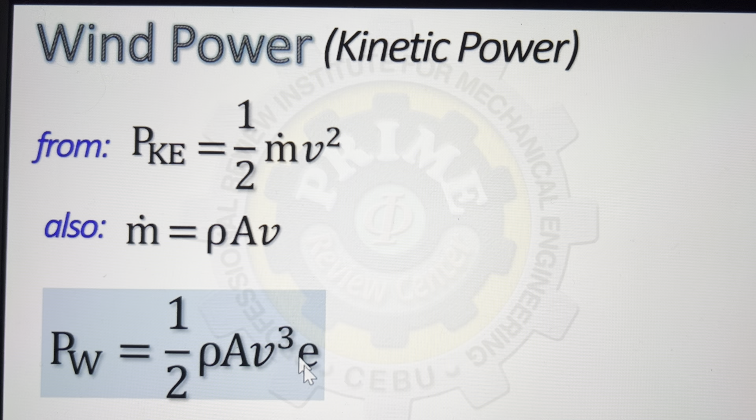Sabi natin sa thermodynamics, mass flow rate is density times the cross-sectional area or the normal area times the velocity. So pag i-combine ko yung dalawa, your kinetic power or wind power kung tawagin is 1/2 density area velocity cube. Ita-times mo ng efficiency kasi tayo ay work producer. Okay? Paliit ng paliit kumbaga ang ating output power.

Okay? So tatandaan natin at STP or standard temperature pressure of air, that is 1 atmosphere 21 degrees Celsius, ang ating density is 1.2 pag SI, pag English naman ay 0.075. But if not STP, since air is an ideal gas, assumed to be ideal, gagamit tayo ng PV equals MRT, density is P over RT. Yan yung gagamitin natin. Okay?

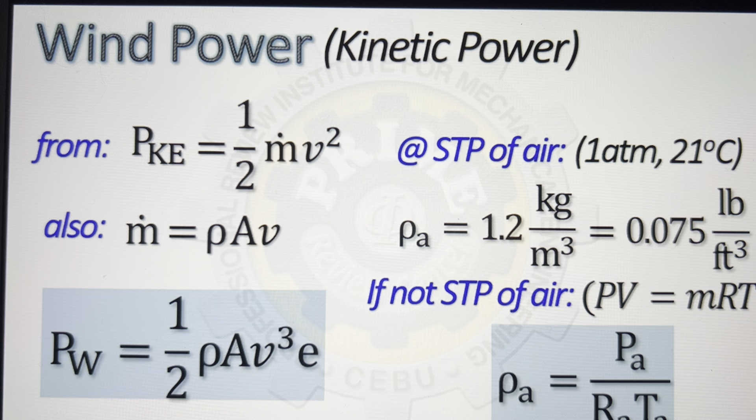So magaan-gaan lang to. So let's try this example. Our country is embarking into use a renewable energy source like wind power to save energy. Determine the maximum power in kilowatts delivered from 55 kph wind. So meron tayong given na 55 kph para sa velocity. The rotor blade diameter is 32 meters. The overall conversion efficiency is 35%. The air pressure is 100 and the temperature is 32.

Again, kukunin natin ang power to be delivered. Okay, power to be delivered. So, again, tandaan natin, this is the formula. So, kung papansinin natin, sir, direct sub na ba? Hindi pa, kasi hindi tayo naka-STP. So, again, pag hindi STP, ito yung formula natin.

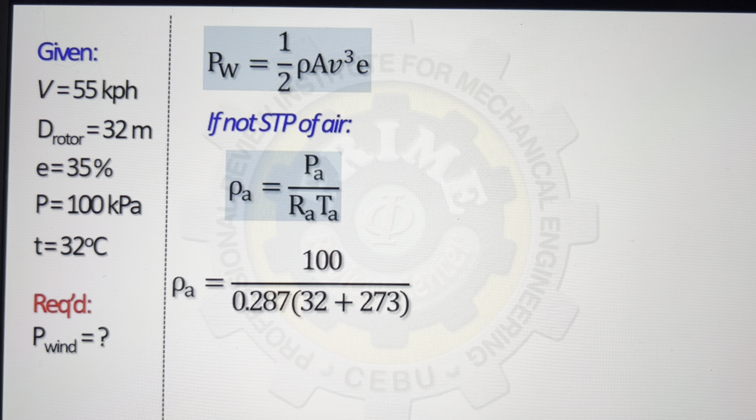So, kunin lang natin muna ang ating density. So, this is your density. SI units tayo. Direct sub naman yan. So, ilalagay ko na lang. Okay, so this is our calculator.

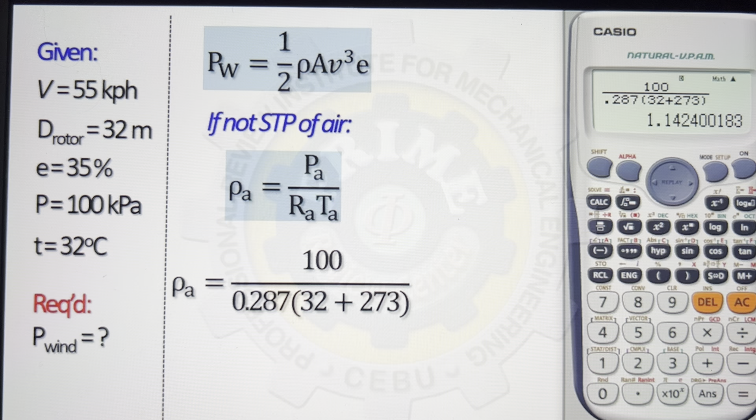Lagay natin. Your density is pressure 100 kilopascal. Of course, R ng air at SI is 0.287 kilojoules per kilogram Kelvin. And then your absolute temperature is 32 plus 273. So, makukuha natin na 1.142 ang ating density. Then, after that, pwede na natin kunin ang ating kinetic power.

That is 1/2, density as solved, 1.142. Of course, the cross-sectional area, since bilog yan, may diameter, is pi over 4 d squared. Then, the velocity is 55 over 3.6. Sa mathematics, tinuro na yan. Conversion factor, kph divided by 3.6 magiging meters per second, cube natin. And lastly, the efficiency. So, input na lang natin yan sa calcu.

Lipat lang natin to. Okay, so dito na lang. So, ilipat natin. So, ngayon, that is 1/2 or 0.5 para mas mabilis pindutin, times 1.142, times area is pi over 4 diameter squared, that is 32 squared. Then, you have your velocity. It should be in meters per second, kaya meron tayo sa denominator na 3.6.

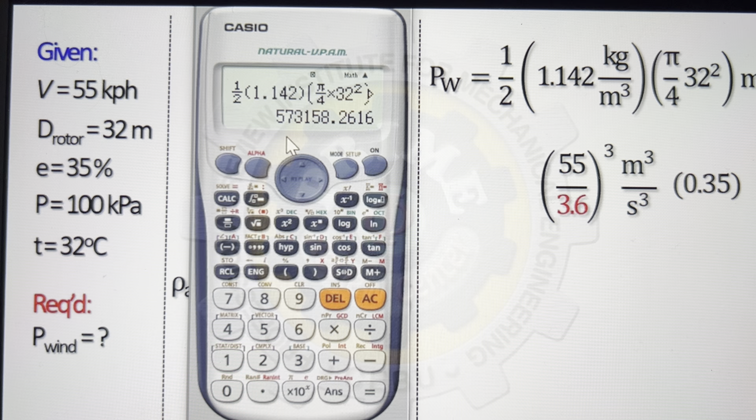Tatandaan na cube yan. And lastly, don't forget the efficiency. Mababa lang po normally ang efficiency ng wind turbine. Okay? So, meron tayong 573,000. So, ang tanong na lang, what is the units? 573,000. So, unit analysis tayo.

Magka-cancel out yung cubic meters. May matitira tayo dito. Kilogram, kukunin ko yung isang meter, i-divide ko ng second squared. Doon po ay Newton. Tapos may isa pang meter. Newton meter is joules. I-divide mo ng second, that is watts. Okay? So, yan po yung makukuha natin.

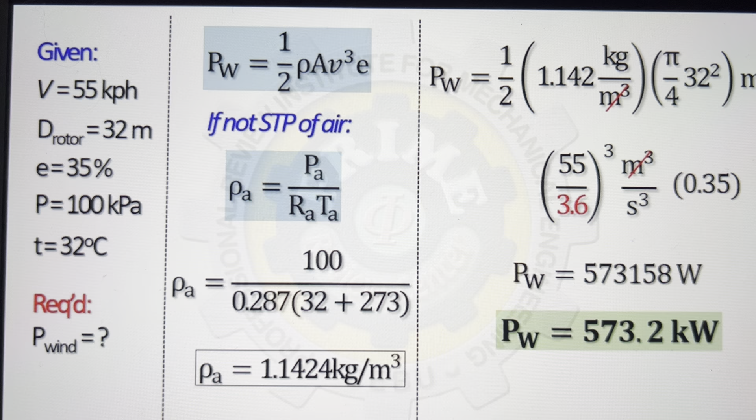Watts. So, i-divide mo na lang ng 1,000. Meron tayong 573.2, niround off ko na, kilowatts. Okay? So, yan po yung ating final answer. Sige? Solve pa tayo ng isa sa wind turbine, no?

So, a windmill with 6-meter radius rotor is to be installed with atmospheric pressure 101.325, 21 degrees Celsius. It was observed that the wind is blowing steadily at an average velocity of 20 meters per second. Assuming the conversion efficiency is somewhere between 20 and 25%, determine the maximum power from the windmill.

Okay, ang tinatanong ay maximum power from the windmill. Ito, may choices tayo dyan. So, next na lang natin. So, again, working equation, ito po yung kanina. So, ang tinatanong ay maximum power. Obviously, ang kailangan kong gamitin ay the maximum efficiency, which is obviously 25. Direct sub naman po ito, no?

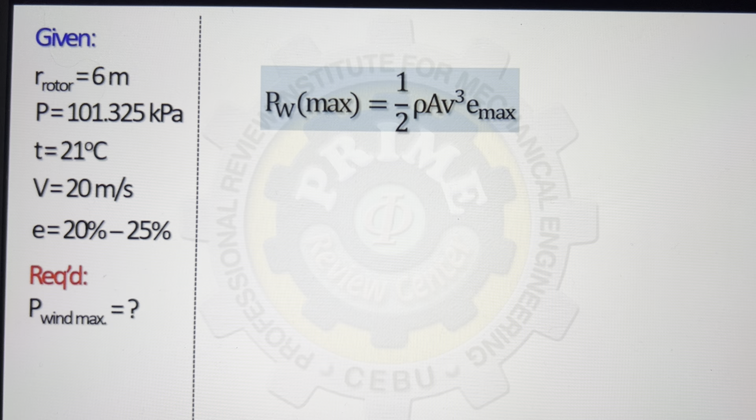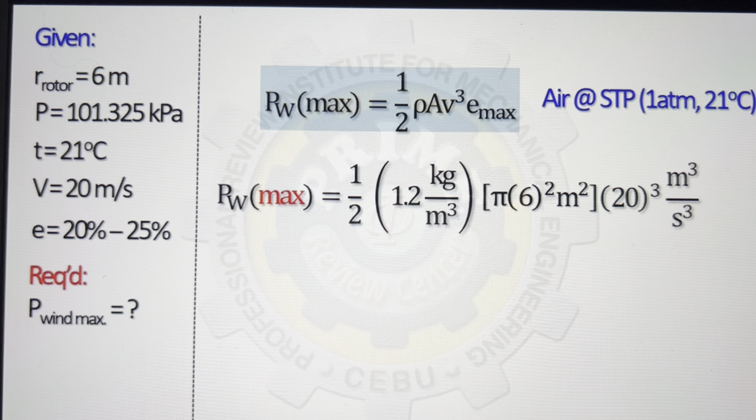So, lagay lang natin. Good thing, air it is at STP. 1 atmosphere kasi is 101.325 kilopascal. So, gagamit lang tayo ng standard density ng air at SI unit, which is 1.2 po. Okay? Area again, since radius to, pi r squared. Velocity, cube, and then maximum efficiency to be 0.25. Pindutin na lang natin yan sa calcu. Okay? So, isit ko lang ito ng konti.

Maximum power. Okay? So, 1/2, 0.5 na lang sa calcu para mas mabilis. 0.5 times density 1.2 times pi r squared. Then you have 20 cube. And then, the maximum efficiency is 0.25. Okay, so ang lalabas dyan ay, SD ko lang,

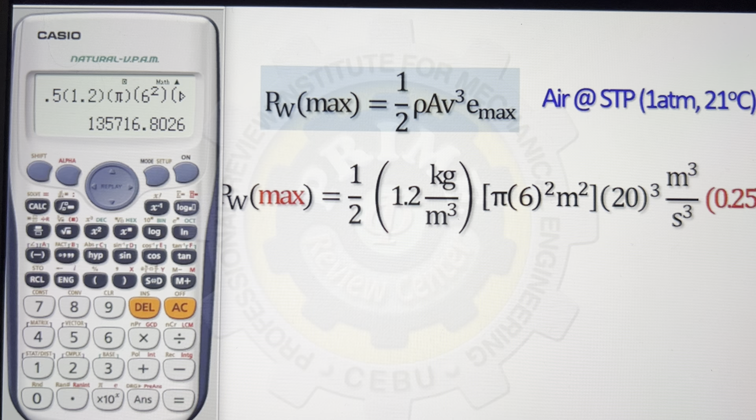135,716. Again, ang unit nito, since SI, kagaya kanina, ay watts. Okay, so divide mo lang ng 1,000. So you have your final answer to be 135.7 kilowatts. Okay, so napakabilis po ng wind power plant. Sige, so hopefully nasundan natin.